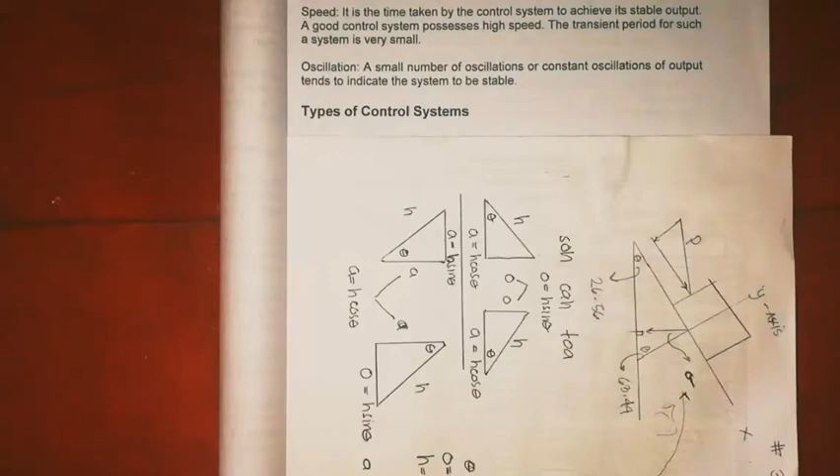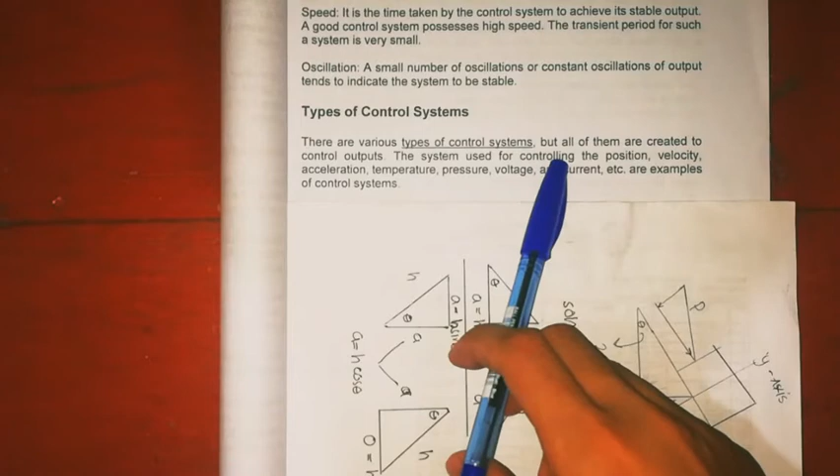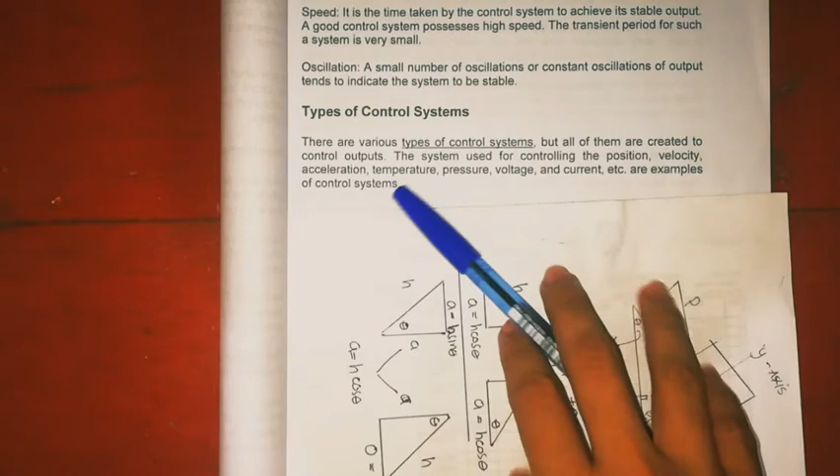Next topic natin is about types of control system. There are various types of control system, but all of them are created to control output. The system used for controlling the position, velocity, acceleration, temperature, pressure, voltage, and current are examples of control system. So ito yung mga example.

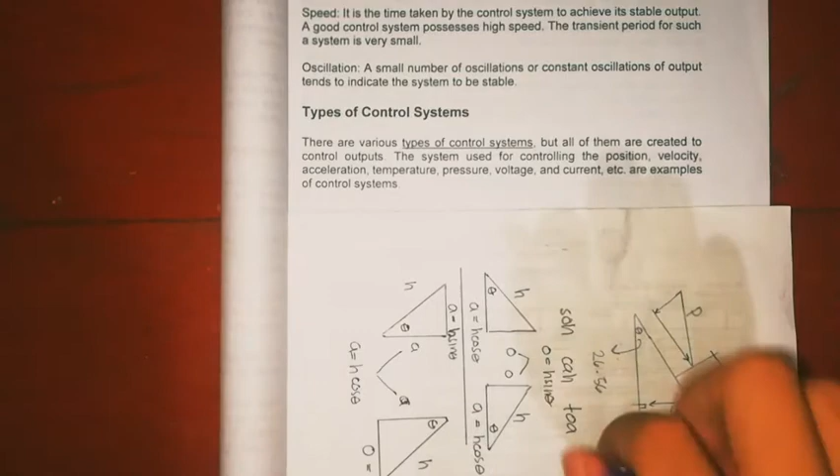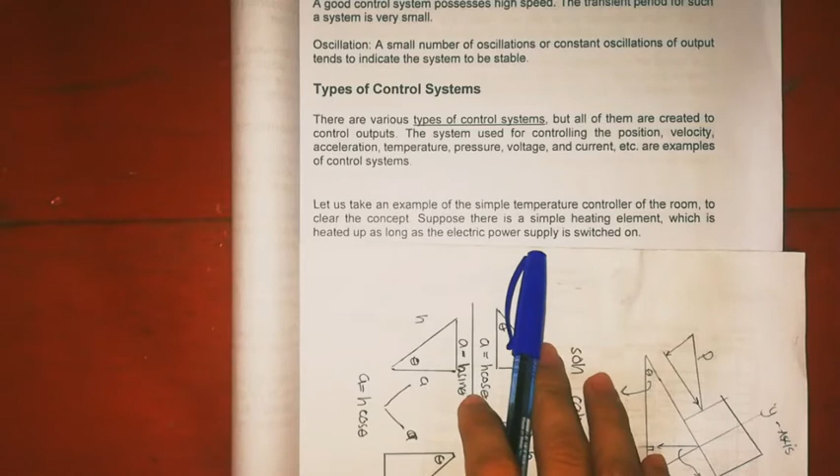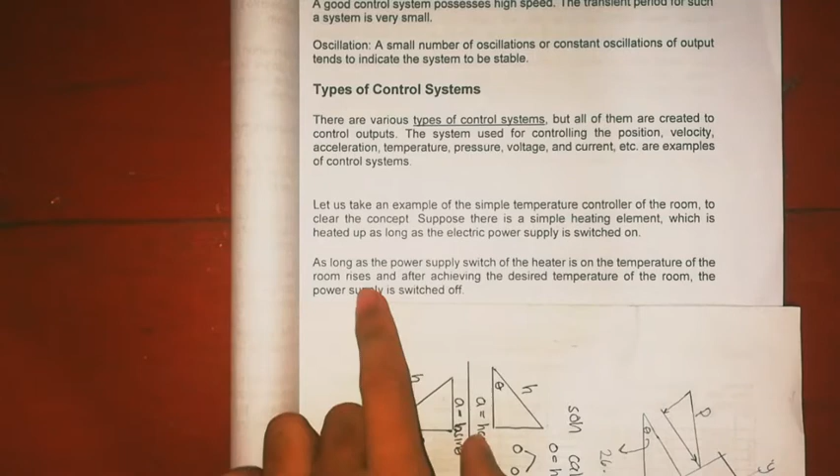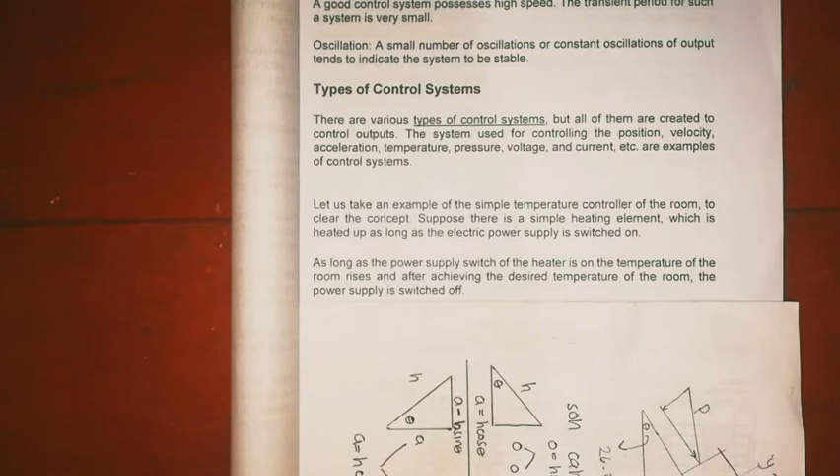So ito, bigay tayo ng example. Let us take an example of a simple temperature controller of the room. To clear the concept, suppose there is a simple heating element which is heated up as long as the electric power supply is switched on. As long as the power supply of the heater is on, the temperature of the room rises, and after achieving the desired temperature of the room, the power supply is switched off.

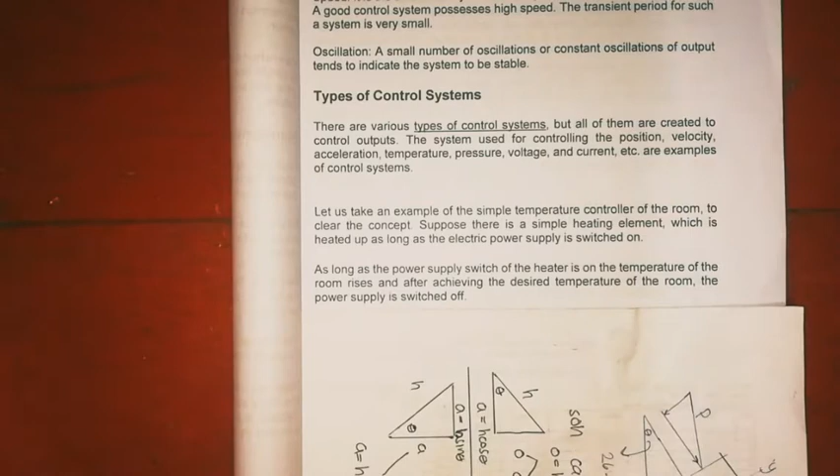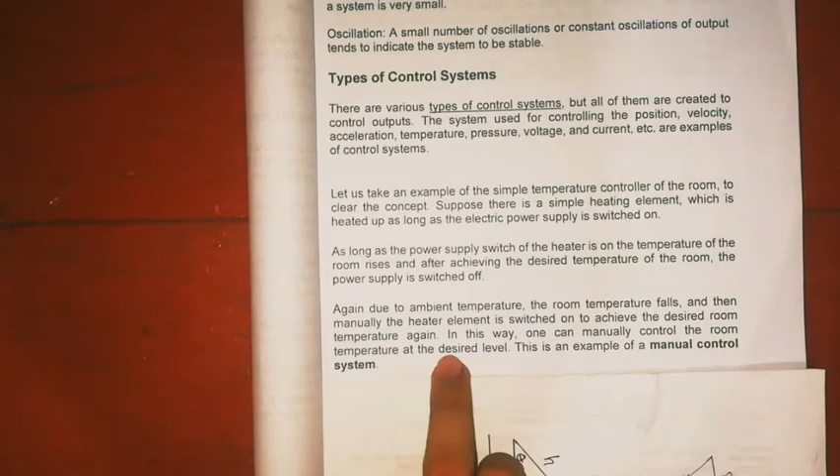Again, due to ambient temperature, the room temperature falls. And then manually the heater element is switched on to achieve the desired room temperature again. In this way, one can manually control the room temperature at the desired level. This example is a manual control system.

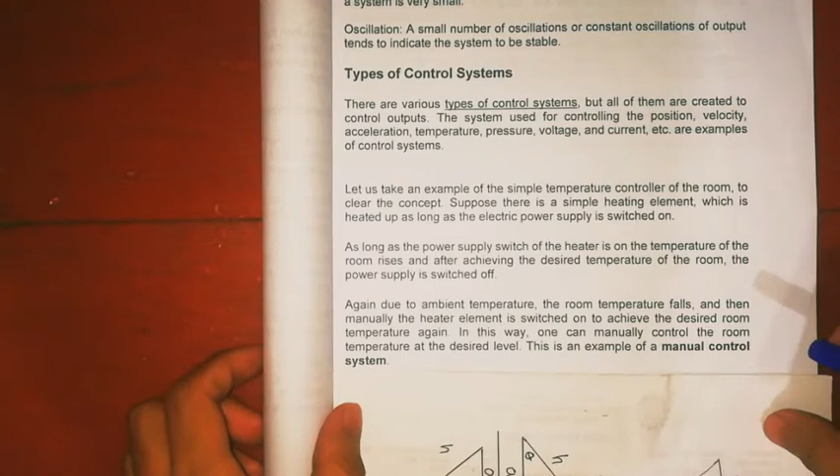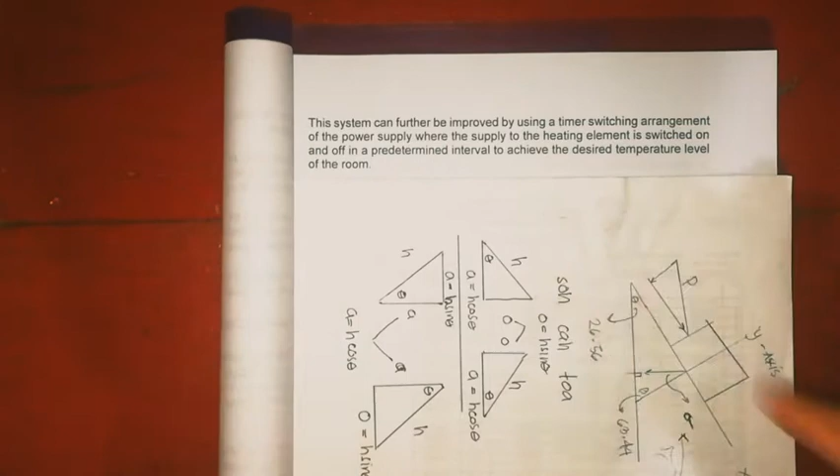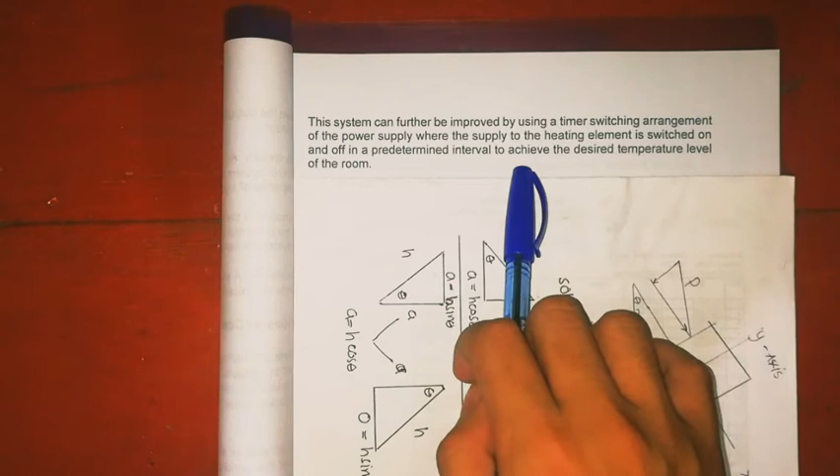The system can be further improved by using a timer switch arrangement of the power supply, where the supply to the heating element is switched on and off at predetermined times to achieve the desired temperature level of the room.

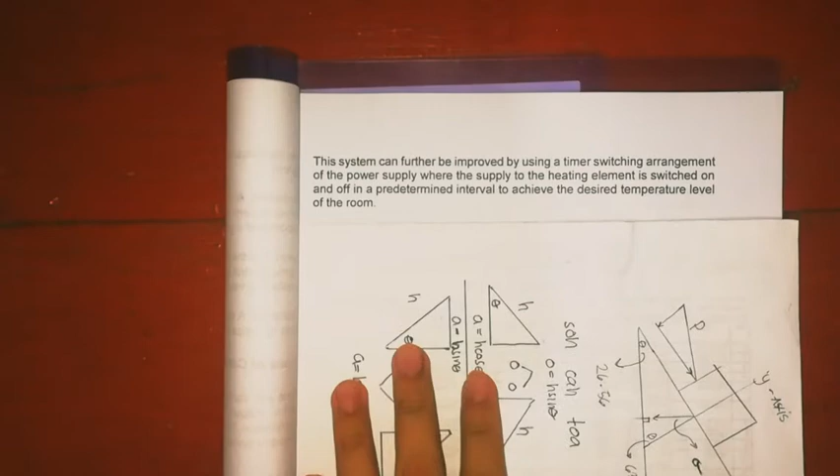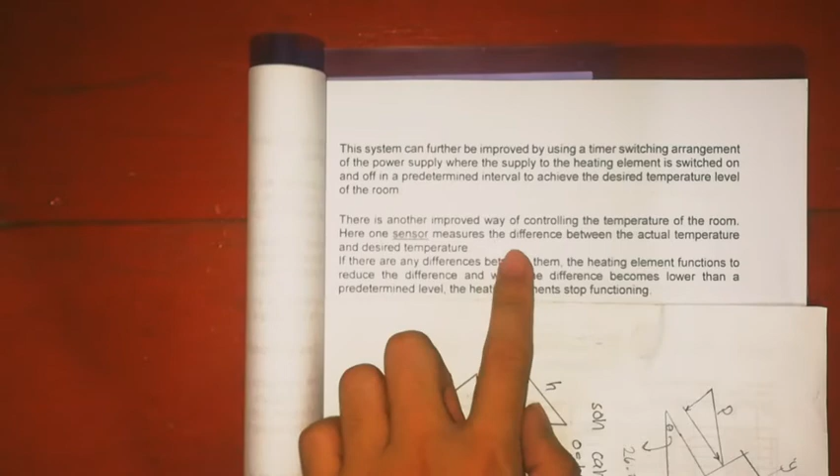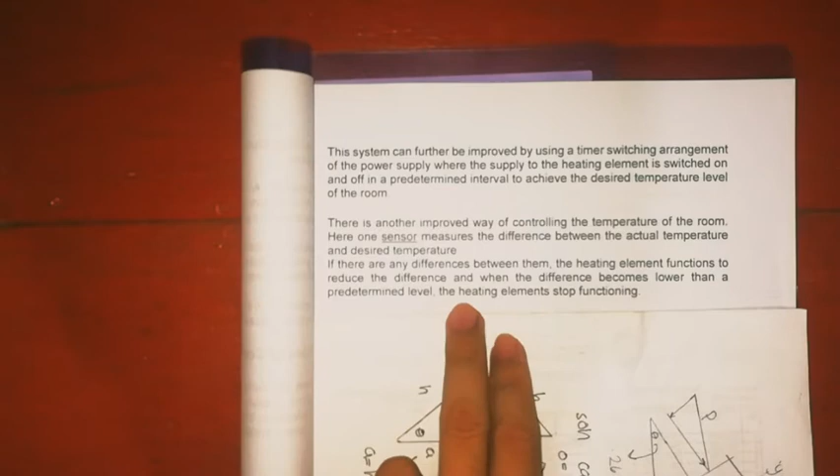There is another improved way of controlling the temperature of the room. Here, a sensor measures the difference between the actual temperature and the desired temperature. If there is any difference between them, the heating element functions to reduce the difference, and when the difference becomes lower than a predetermined level, the heating element stops functioning.

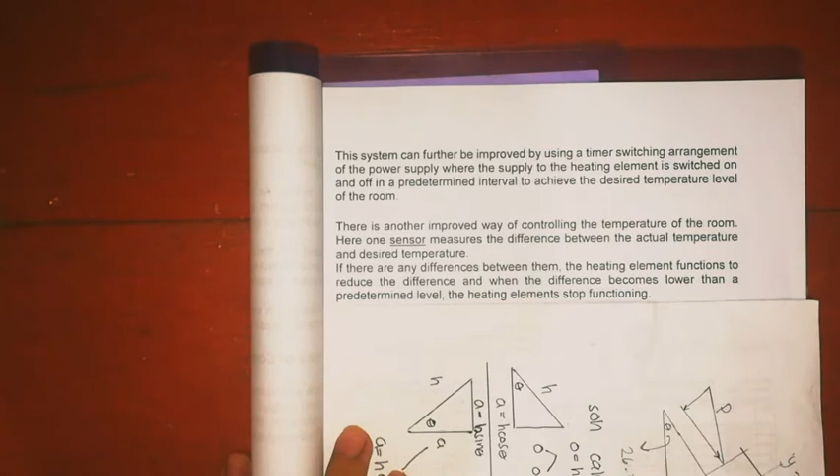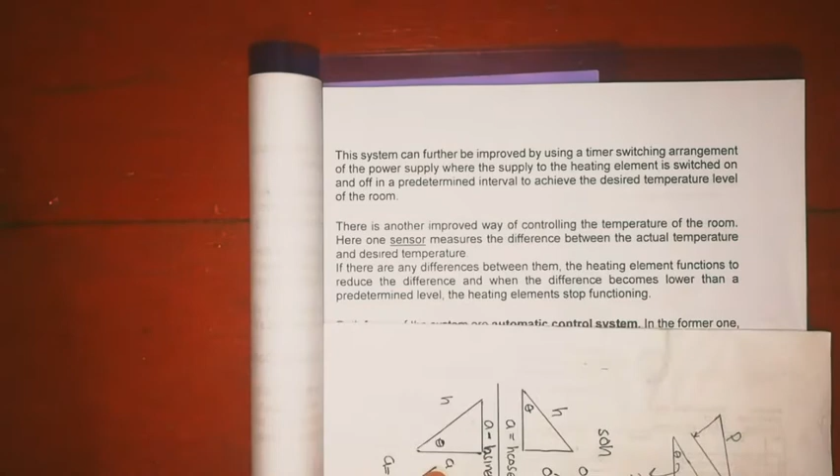Both forms of the system are automatic control system.

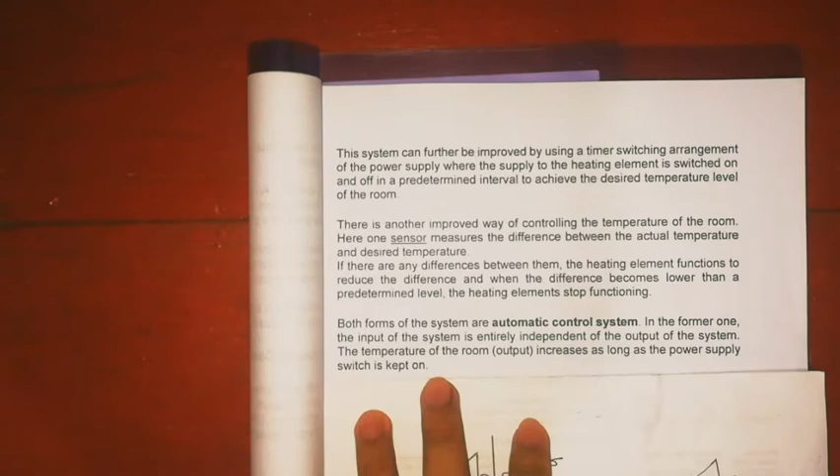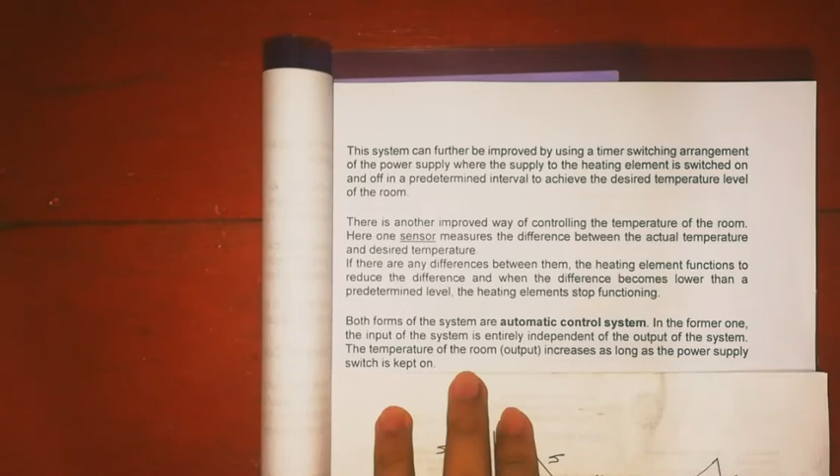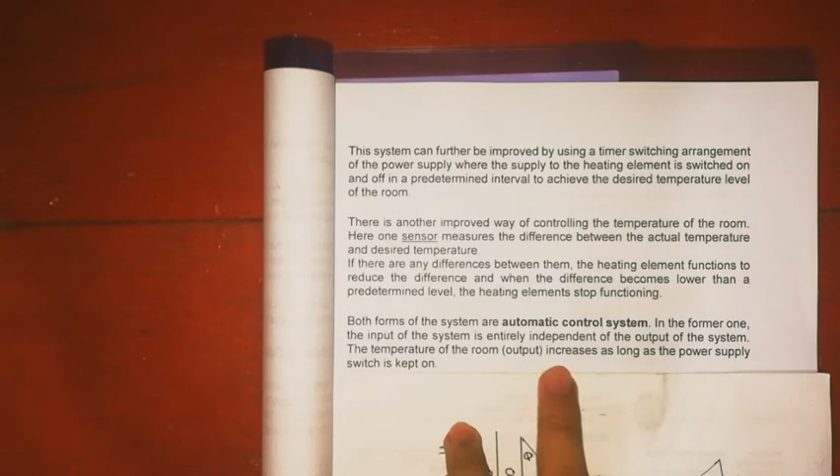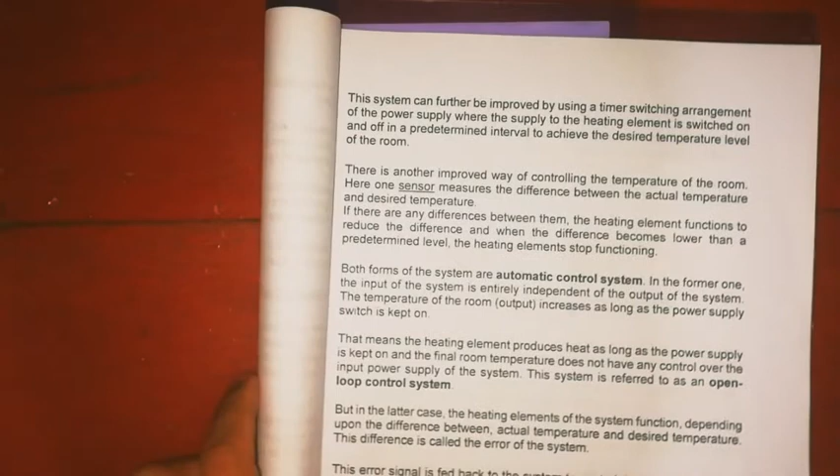Both forms of system are automatic control system. In the former one, the input of the system is entirely independent of the output of the system. The temperature of the room, the output, increases as long as the power supply switch is kept on. That means the heating element produces heat as long as the power supply is kept on, and the final room temperature does not have any control over the input power supply of the system.

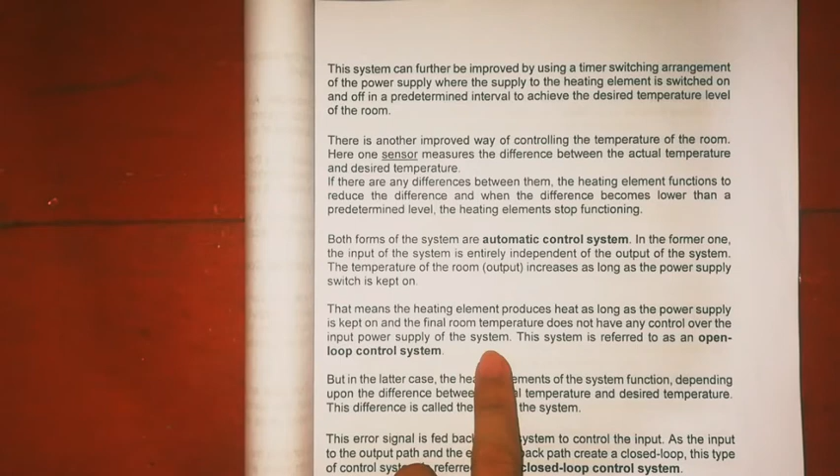The system is called open loop control system. So itong open loop, i-discuss natin to sa next topic.

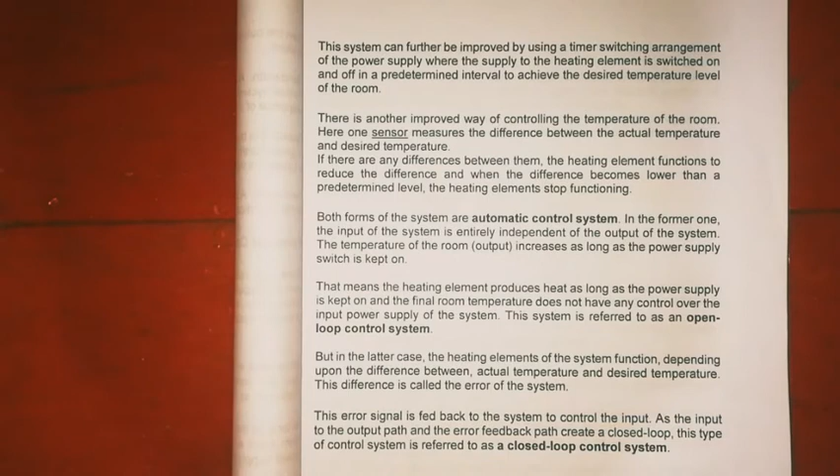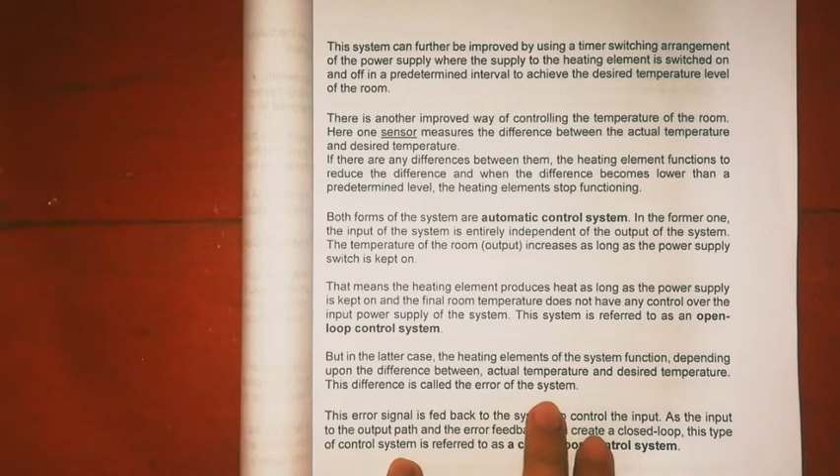But in the latter case, the heating element of the system functions depending upon the difference between the actual temperature and the desired temperature. This difference is called the error of the system. The error signal is fed back to the system to control the input. As the input to output path and the error feedback create a closed loop, this type of control is referred to as a closed loop control system.